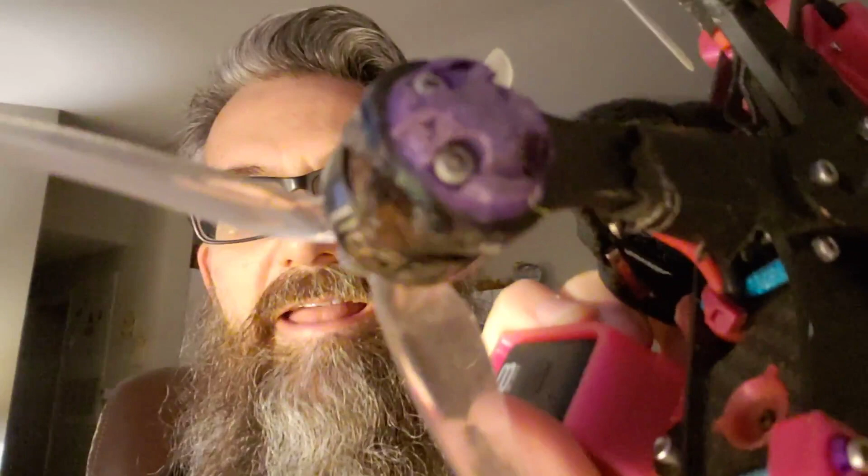Well, if you're like me before, you would just be like, oh well, I'll just suffer through it, and then your arms end up looking like that. Look at that mess. You get torn all the bits. Or you could be like Stacy of today. Design your own bumpers, and then you're good. So if you guys want to find out how to design your own and get those 3D printed, stick around, I'm going to show you.

Okay, so you decided to design your own 3D bumpers. What do you need to do this? We need a couple things. You're going to need a cup or something similar because you're going to want to set your camera up high on something. You'll see why here in a minute. You're going to need something else to set your arm on, a little bit lower. Don't you love this broken GoPro camera? Or something similar.

You're going to want to get a white piece of paper. And of course, you're going to need the arm, or arms if your arms are different. In my case, they're all the same, they're just flipped over. But if your arms are different for one side or the other, or for front or back, you're going to want to get an example of each one of those. And of course, you're going to need your camera.

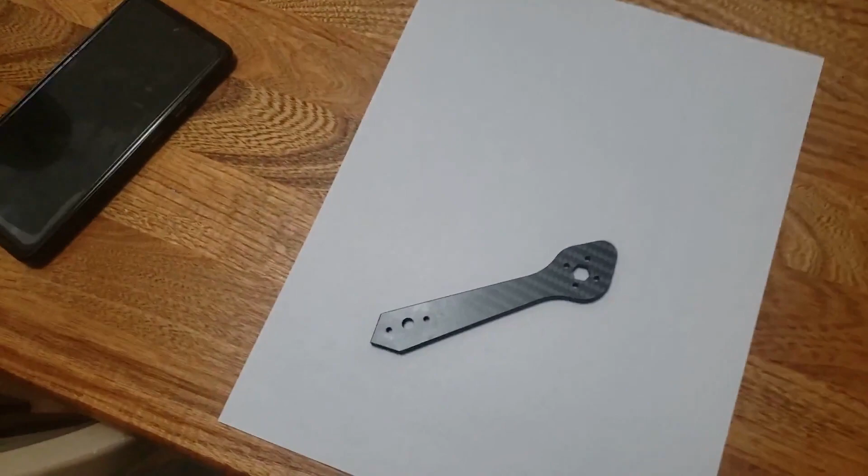So you're going to ask, how are we going to do this? What you want to do is take your cup here and sit your cup down on your paper. The reason we need this is we need something to set the camera on up high. Then we're going to want to get our arm and sit it down. We want to raise it up too. We want to put our arm on the paper. Why do we need the paper? We want the paper so that we don't have anything in the background. It'll make it much easier whenever we put this into our design program.

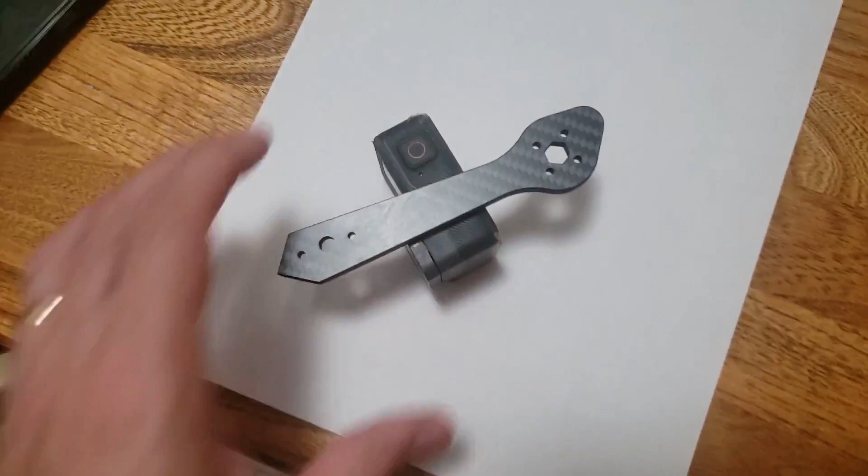And the reason we want to raise this up is you can see now I can see the holes through here, because we want to be able to see where those holes are. We're going to need those holes in the exact right position. Okay, so let's get this set up. My lighting is terrible. You want this to be in a case where you don't get a lot of shadows, but if you have shadows, it'll work out okay, you'll just have a little more difficulty. If you can have light straight down on top of it, it'll work better.

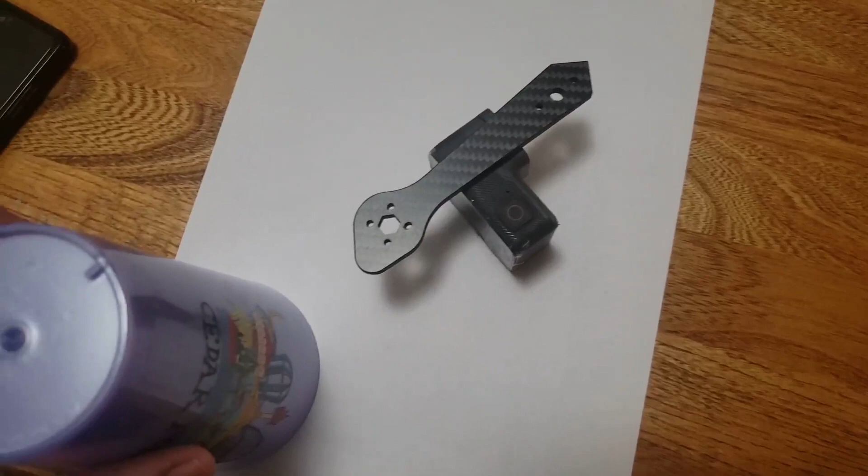So what you're going to do is set your arm here on something raised up, right? And then we're going to set our cup here, and then set our camera on this, and we're going to take a picture of it. So let me show you what that looks like on the camera app.

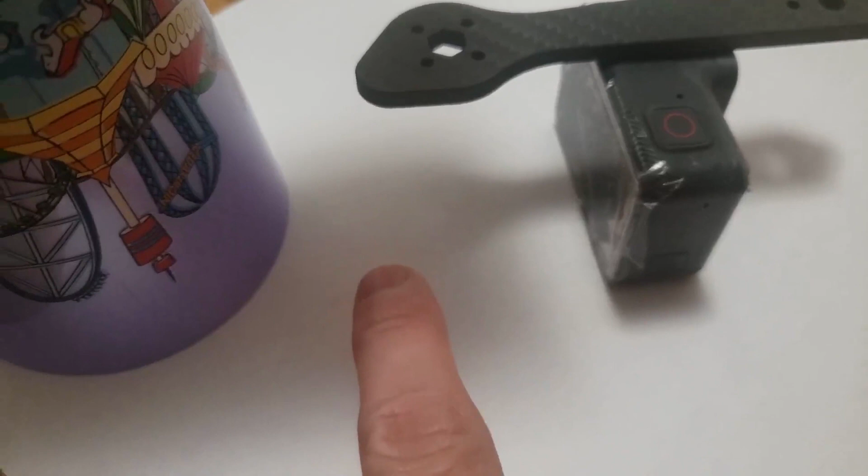Alright, so when you're all set up, you're going to have something like this. You've got your arm raised up here, sitting on, in this case, a GoPro, and then something a bit higher, a cup in this case, with my phone sitting on it and the camera facing straight down. When you take the picture, you're going to be able to see those holes nice and perfect, just like that. You want this as straight down over top of this as you can get it. Then we're going to take the picture, pull it into a program, and do a little cleanup on it.

Now I'm not going to show you the picture on my son's phone, I've already got the picture from mine. I'm going to show you the picture that I took, and we're going to walk through the steps with mine. You're going to see exactly how that works.

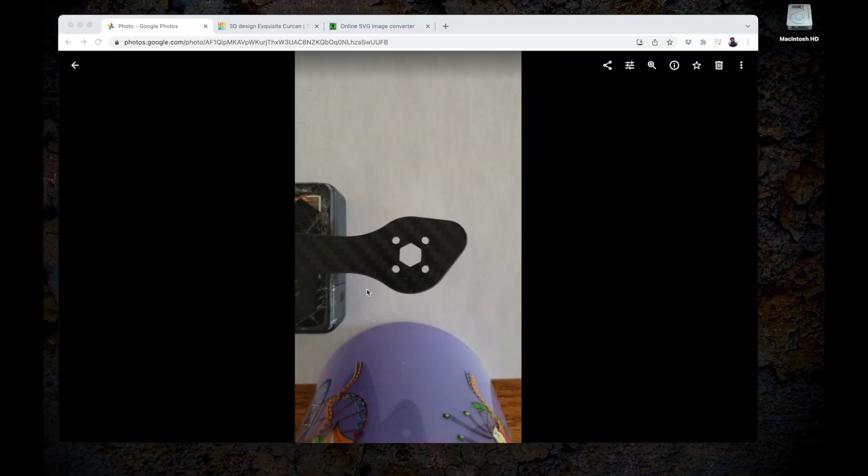This is the image that I ended up taking. As you can see, here's the arm sitting on top of the GoPro, and here's the base of the cup, just like I was describing, sitting on a white piece of paper. It looks like we have a pretty good image. There's nice clean edges on the edge of the arm, and the holes, everything looks nice and clean, and we don't see too many shadows.

There is a little bit of warping here because of the angle. The camera probably needed to be forward just a little bit more. It's pretty close - the arm needed to be down this way just a little bit, but other than that it's pretty good. So all of this is good, but I don't want to have this camera here.

I don't need the cup. I want to eliminate as much of this surrounding stuff, and I only really need about right in here for the arm bumper. So what I did was I took this image and then I cropped it down, and I will show you that. There it is, nice and cropped down. You can see it a little closer here.

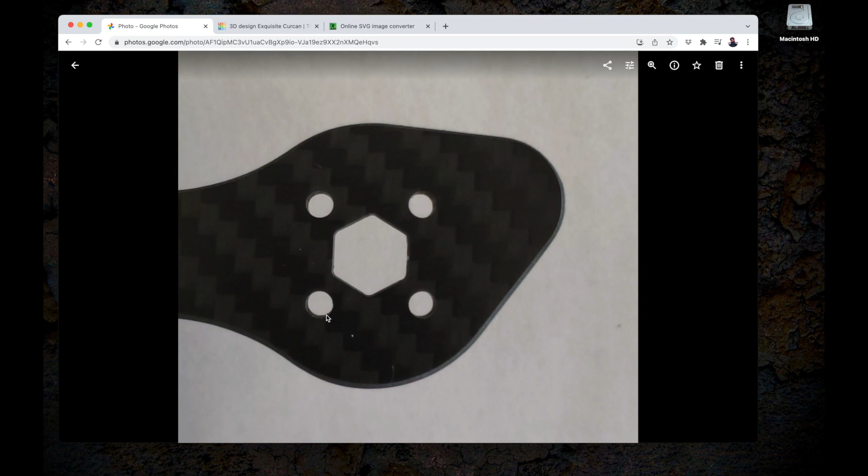You can see this warping really isn't warping, you're just seeing the inside edge of the arm holes here. You can see the thickness on the arms there. So if this was a little more straight down, you wouldn't see that, or you would see it a little bit less. Again, this is minor and really won't affect this too much.

What I'm going to do is pull this image, after I convert it to SVG, into Inkscape. I'm going to clean these holes up just a little bit because they will be warped just slightly, and I'm going to get rid of this center here because I don't want this in my arm bumper. If you wanted to leave this in your arm bumper, you could do that, but I'm going to take this out of mine because I don't want dirt and stuff to get up in there. So that's a piece I'm going to take out, gives it a little more strength as well.

Anyways, let's get into online convert and convert this image over, and then we will do a little bit of cleanup, and then we will pull this into Tinkercad.

With onlineconvert.com, we're going to convert our image to SVG. All we need to do is take our image that we took a picture of, and drag this up into here. It's going to load this, give it a few seconds. 100%, it's got it. There are settings that you can change depending on what you want to do.

Honestly, I've not used any settings, so I don't know what they do, what they don't do. But if you have a fairly clean image like we do, with a white background and your black carbon arm, you really shouldn't need to change any of these settings, and it should work pretty well.

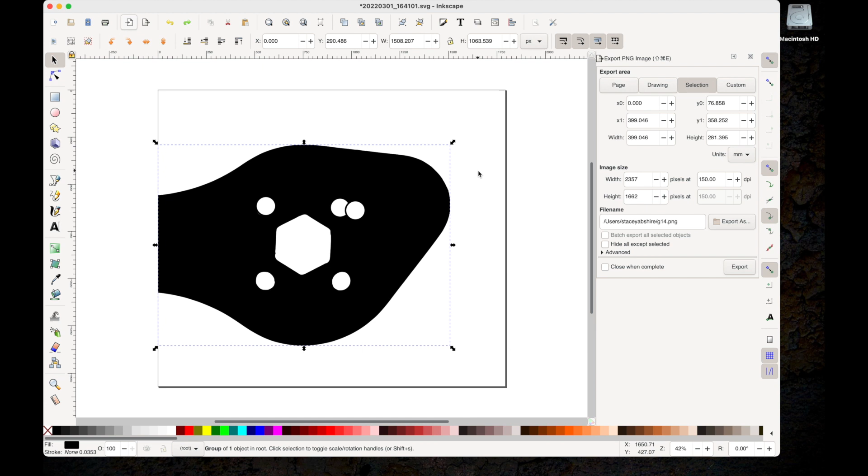Okay, this is starting to get on my nerves, guys. Undo move. Okay, I do not know what is going on here with this. Why is it being... let's try this. Let's try moving it with the keyboard. Ah, there we go, that's better.

So let's get it down in there with the keyboard. I'm using Shift and the arrow keys, by the way. There we go. Now let's paste another one, and we're going to use the keyboard and move it down here. Get close, move this all the way down. There we go, get those guys.

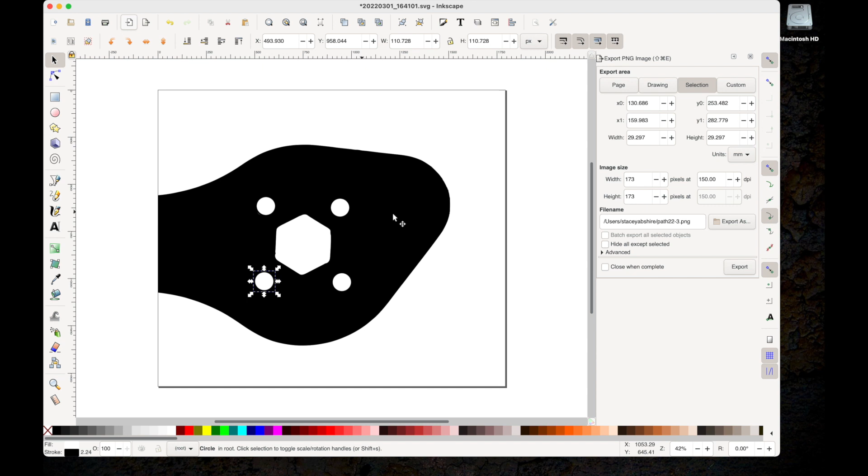Now I want to choose the fill tool, which is this bucket here, and we want to make sure our fill is black. Okay, got that. We want to fill this in. Okay, we have all of this done here.

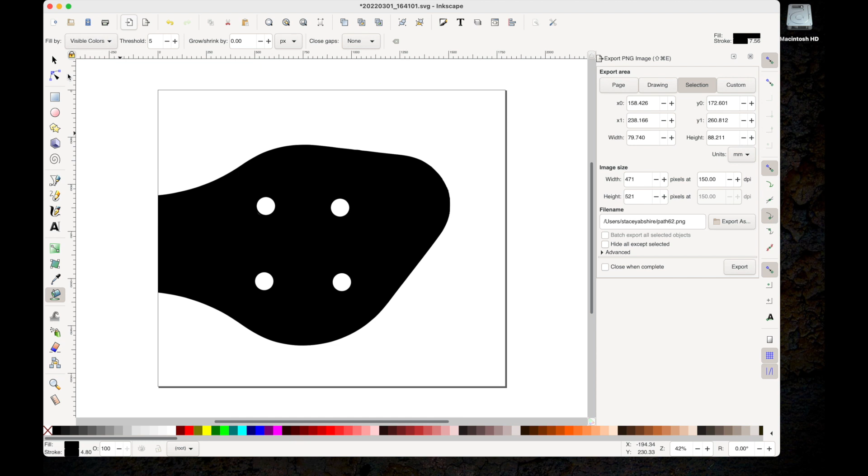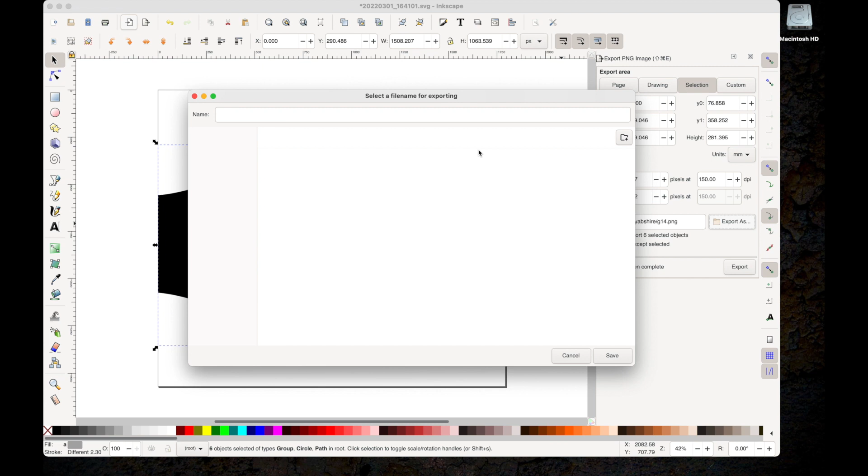Now what I want to do is select all of this here, drag and select this stuff. Okay, I got everything selected, and now I've got my selection here, and I've got where I'm going to export this out, and I'm going to change this position here, put it in download, and let's just call this moxy-1.png. That's where we want to export it. If I didn't actually export it, that's just where I'm going to export it.

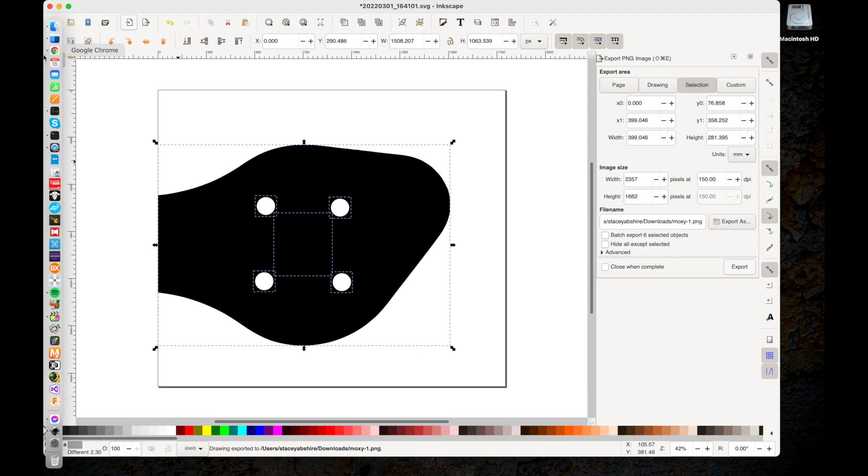Now you've got to actually click the export button. And we are on selection, and this is what we have selected. So hit export, and this will export out our PNG, and we will go pull this PNG up in Online Convert, and then run that through the process, and then we can pull that resulting image into TinkerCAD and do our designing.

Here we are with Online Convert again, and I'm going to show you what our resulting image looks like.

Let me pull this open here, and you can see our image cropped nicely right on those edges. Our pieces are filled in, and you can see these circles are nice and perfect, basically the same size they were before, but nice and round like they should be, which is what we want.

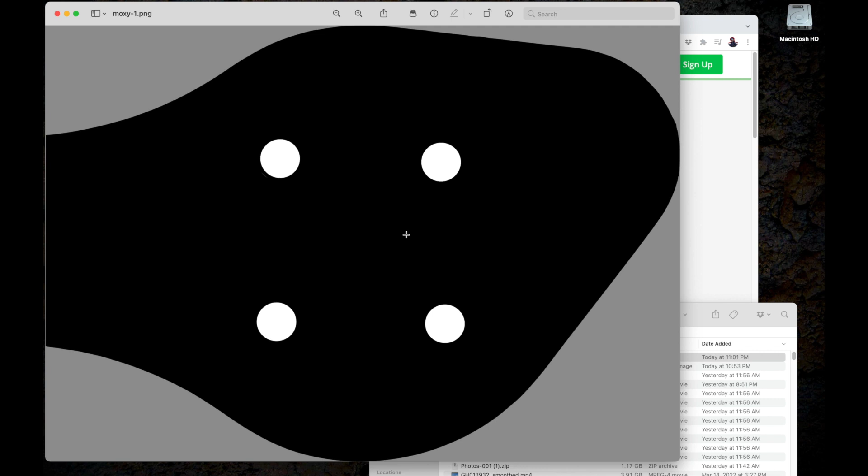So we're going to take this image and pull it into our Online Convert tool and convert this to SVG. We click Start, not changing anything, and it processes just like before and auto-downloads. There it goes, moxy-1.svg. I'll show you what that resulting image looks like. There we go, a nice clean SVG image, huge on screen, I know. It doesn't let me size it back down, but you can see just how clean this image is.

Looks very good. So now we're going to take this SVG image and pull it into TinkerCAD, and we're going to do our designing for our arm bumper.

Here we are in TinkerCAD, and we are going to import our SVG and do some designing with that. The first thing we need to do is go up here where it says Import, and we click Import. There we go. We're going to choose the file we just created, which in our case is moxy-1.svg. We take this file, drop it up here, and the first thing it's going to do is complain.

It's going to say, hey, this image is too big, it's going to be bigger than the workspace, we can't work with that. So we need to resize this to something that is workable.

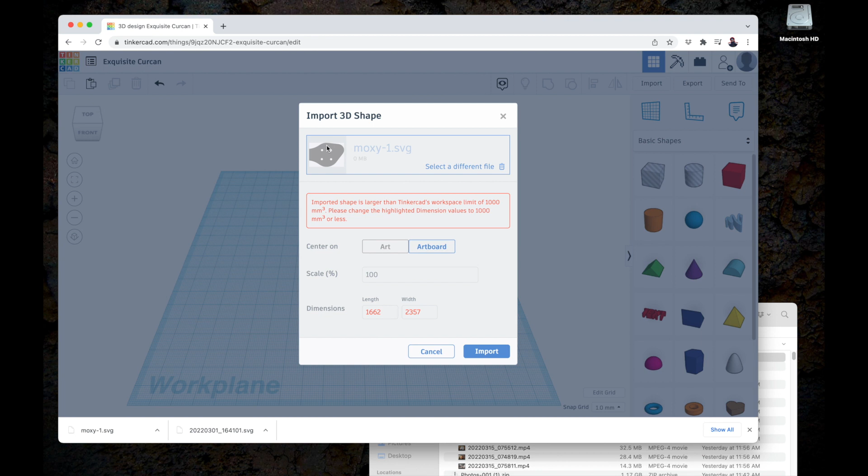Because I measured this and know that it's 30 millimeters, I'm going to come down to length and put in 30. It's already in millimeter mode, so I change that to 30, and it gives me the other dimension, 42.55, which is fine. I don't really know what that should be, but if this is 30, which it is, then this will be correct for this length here. And we're going to click Import.

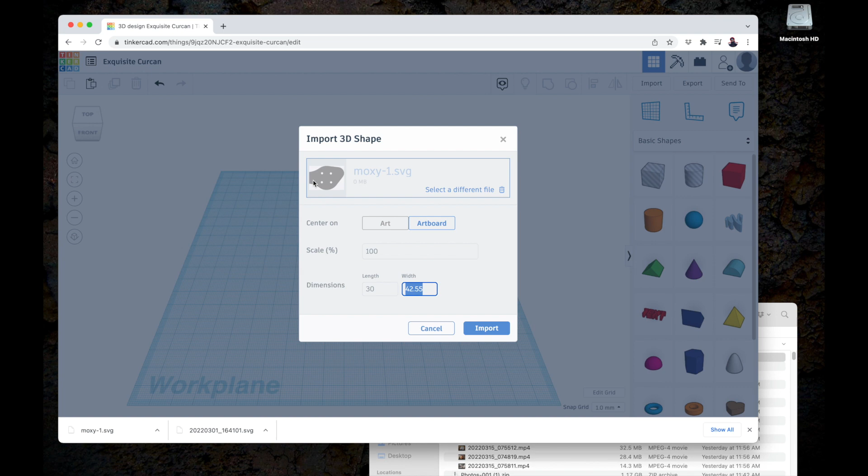This is going to pull our image in, and we'll have an object in TinkerCAD that we can work with. So I have to zoom this in so you can see it a little bit, just to show you what this looks like, and then we're going to work with it. You can see we got our holes there, nice, exactly what we want. Everything looks good—this is what the end of the arm looks like.

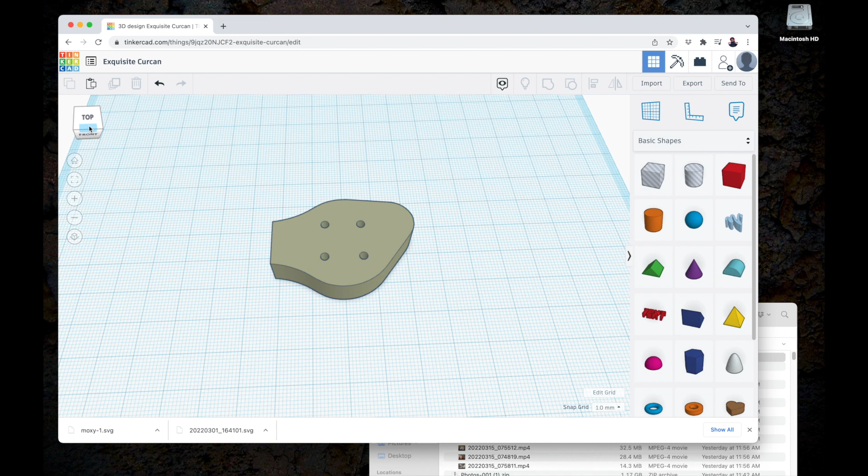Now, if you click this, you can see this is our size here: 29.99, basically 30 millimeters. I don't know why it's a hundredth of a millimeter short, but that's fine. 30 millimeters that way, and we see we're 42.55 millimeters that way, and right now this thing is like 10 millimeters thick. We're going to change that in a little bit, and we'll get to that.

So the first thing we want to do once we have this in here is create a couple of different pieces, and we're going to use those pieces and put them all back together to make the arm bumper.

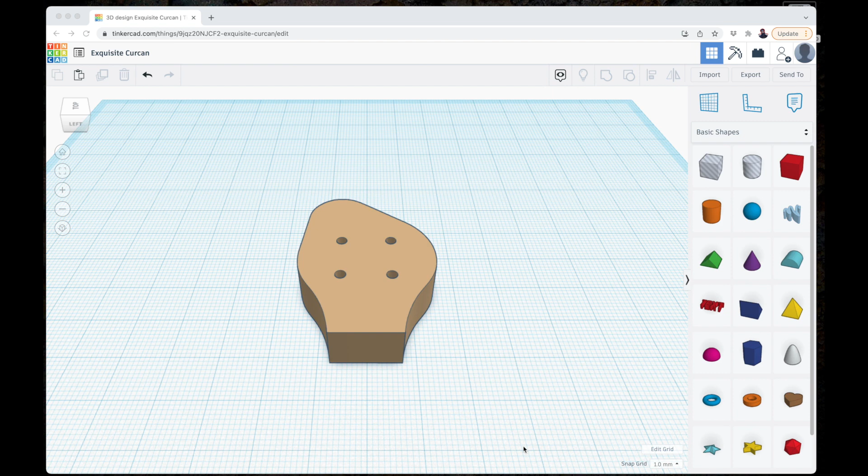So we have our image imported. What we need to do with this is create a couple of pieces.

We're going to have the bottom piece. We're going to have the side piece, which is like however thick your arm is. In my case, my arms are 5 millimeters thick. So that will be 5 millimeters plus the size of the bottom, which is 2 millimeters.

And then there will be an overlap piece that kind of fills in, comes over this part here, comes around, and allows that bumper to wrap around the top part of the arm. And so that part of the thickness there, it'll be 2 millimeters thick, and it'll be in like 2 millimeters on either side there. And so it'll wrap over top of the arm 2 millimeters.

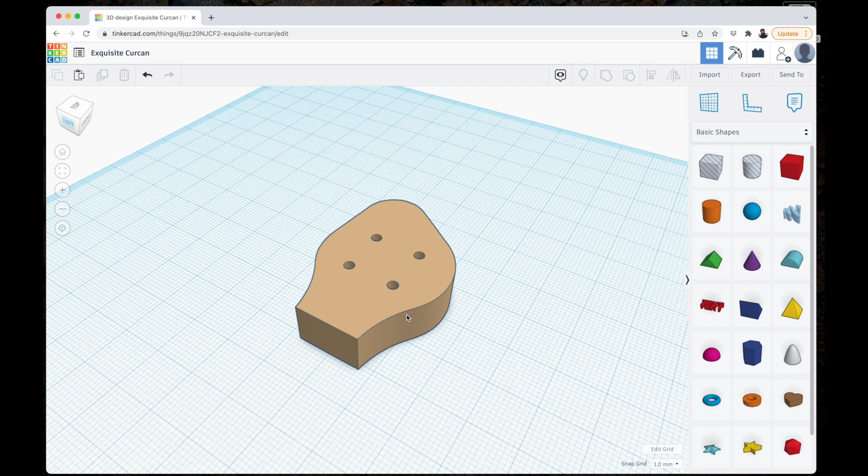So we're going to create those pieces, and then we're going to combine them, and then we're just going to chop off the bottom because it'll be solid all the way around, and there will be the bumper. And it's a very, very simple process to do. So the first thing that we do is we're going to duplicate this. So we're going to create this, we'll click this, and we're going to click the duplicate button.

That should duplicate it. Now we're going to move it, and I'm going to do it with the keyboard, so it's like Shift and the arrow keys to the left here. All right. So that's that first piece that I want to do. Now, the first thing that I want to do is I want to make this a silhouette here, and that fills this in. That makes it the same thing, but it fills it in, and then that'll make it solid.

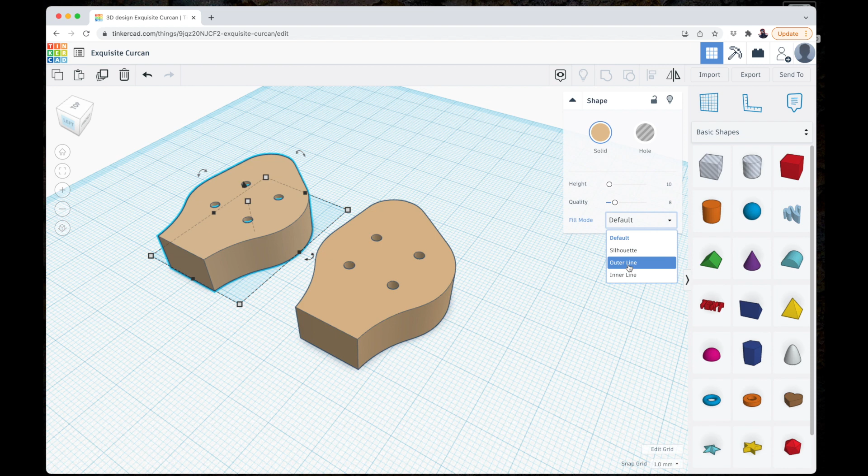And then you have outer line, which makes whatever size you feel, it makes it go from this edge out by that much. And then there's inner line, which goes from this edge and goes in. So in our case, we want to make the edges here, and those edges will be an outer line. Takes it a second here. There it is. And it's got it as 5. I don't want 5. I want to make this 2.

And then the other thing that I want to do is I want to make the corners kind of rounded. That just kind of smooths things out a little bit, makes it a little bit better, right? So that gets us our side. Now the next thing that we need to do with the side, though, is we need to make it the right thickness. Now our bottom of our bumper is going to be 2 millimeters. My thickness of my arm is 5 millimeters.

So that's 7 millimeters. And then I want to come up 2 more millimeters for the top, so I'm just going to go ahead and make it 9. And the only reason I'm doing that is just to make this thing have some overlap with the different pieces so they merge nicely. So I'm going to click this middle piece here. I'm going to set this to 9. Click off, now it's 9.

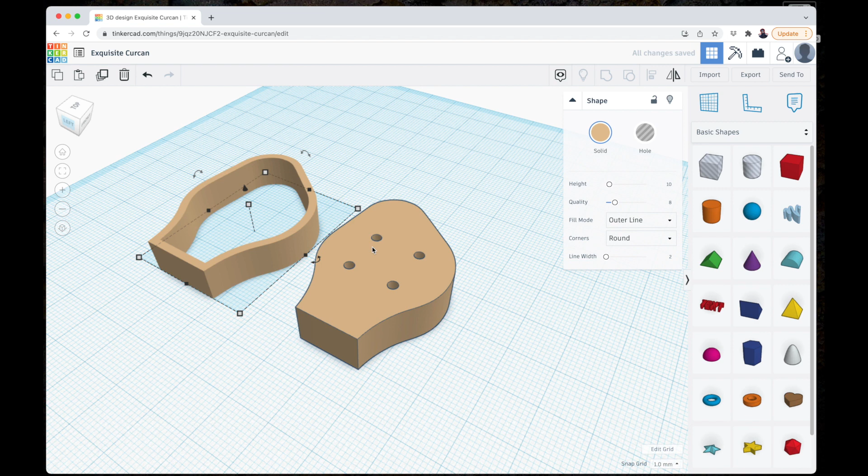Now the next thing I want to do is I want to duplicate this again. So click this. And now this time I'm going to hold down Shift. I'm going to move to the right. Not quite that much. Right. Now this one here is going to be this top piece. And it's going to have that, so I'm going to make this one inner line. And again, it defaults to 5, but I only want it to be 2. So 2, I'm going to come in 2 millimeters.

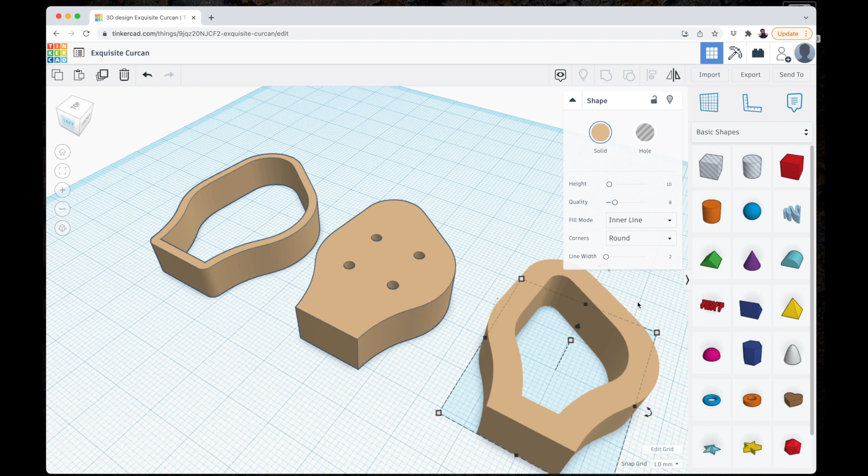And again, once it gets done here, I want to make this round. Okay. Give it a second here. It's thinking about it. There it goes. Now we've got that. Now this is going to be for the top. This only needs to be 2 millimeters. So there we've got that. Now I want to do one more piece and then we're going to combine all this.

I want to duplicate this piece here and I want to raise it up. So I want this like this, and then I want to have a piece on the top. And the reason that I want to have this on the bottom and on the top is I want to have a little bit of an overlap between this and this so that it kind of fills in that gap, right? So we're going to go ahead and duplicate this, and that'll be our top piece.

And then I want to adjust this inner on this one to be just slightly thicker so that when we put it all together, it overlaps nicely. So I'm going to hit the duplicate button up here.

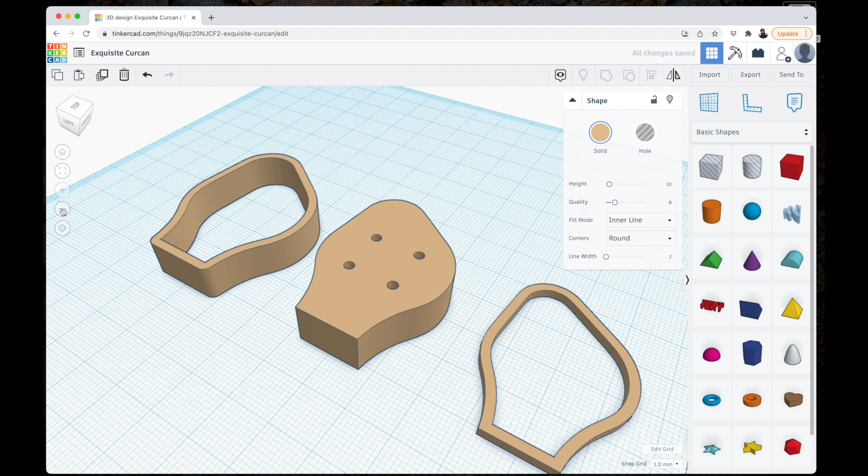And I think it duplicated it off the screen a little bit. Yep, it did. For some reason, it does that. When you move it and duplicate, it'll do the exact same mechanism. So if you do it and you don't see that it's selected, then it probably created it off the edge there. So I've got this. This will be our top one, and this will be our bottom one.

And I want to adjust this line width here. I want to make this 3. And that'll bring this in just a little bit more than the inside of this, which was 2, right? So we combine it. Now we've got our top, we've got our bottom, and we've got this here. And we're going to combine all of these pieces together.

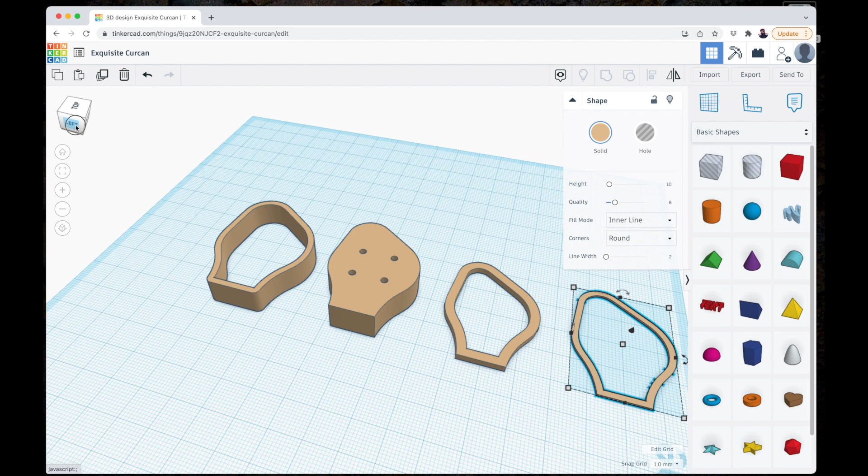The one thing that we need to do here, though, before we combine them, let me show you this here, if I look at it this way, you can see they're all flat on the plane. Well, this top piece needs to be raised up, and our centerpiece with the holes is too thick, so we need to do 2 things. We're going to adjust the thickness here to our 2 millimeters. So I click the middle there, click 2, that makes it 2 millimeters thick.

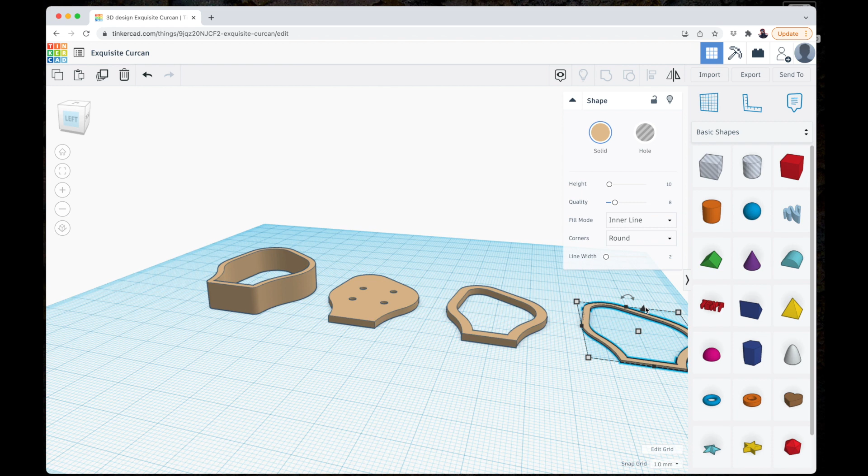And now this one here, we need to raise up. Let me zoom this out so you can see this a little bit. I'm going to grab this little arrow, drag it, and you can notice on the far right there, raising up, there's 3, 4, 5, 6, 7. If I can get it to 7, there we go. You can also click on it and adjust it that way too. So we've got it 7 millimeters up. That's our 2 millimeters here, plus our 5, which gives us 7 millimeters. That's where this will be.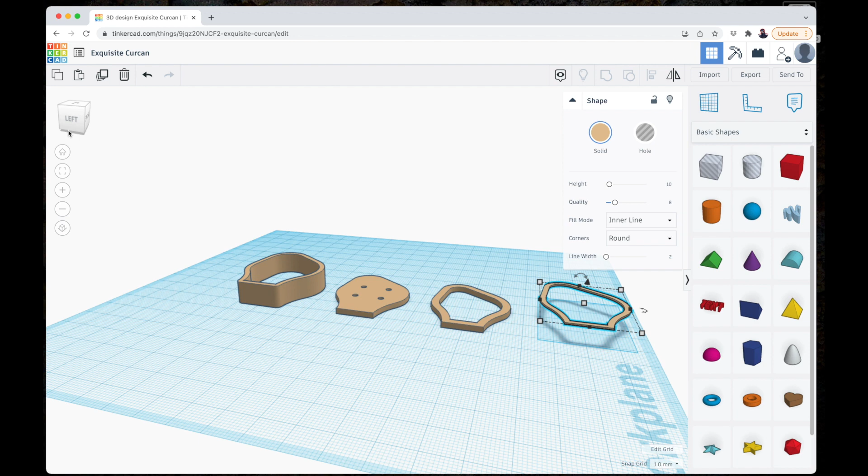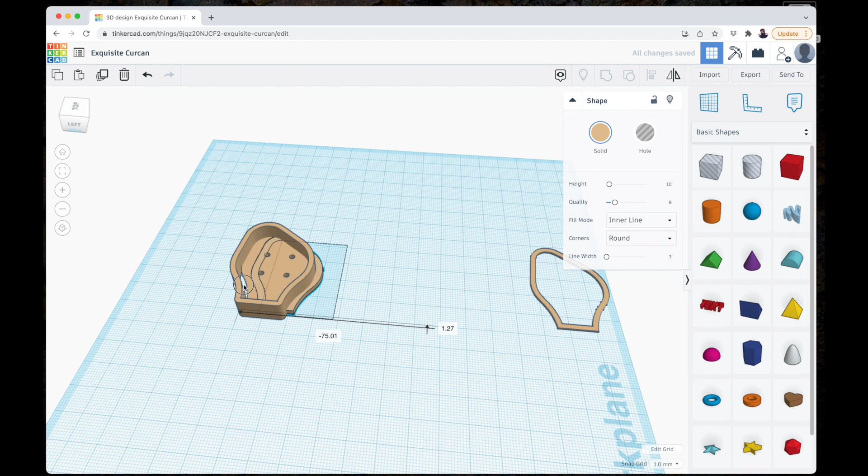And we're going to combine all of these pieces into one and line them up, and then we'll chop off the excess that we don't need, and we will have our arm bumper. So we're just going to take this, click it, drag it over here somewhere close to it. We're going to take this, drag it over here, somewhere close to it. Again, this doesn't have to be precise, and we'll see why in a minute. And then we're going to take this piece, drag it over and get it somewhere close. Now we've got all of our pieces here.

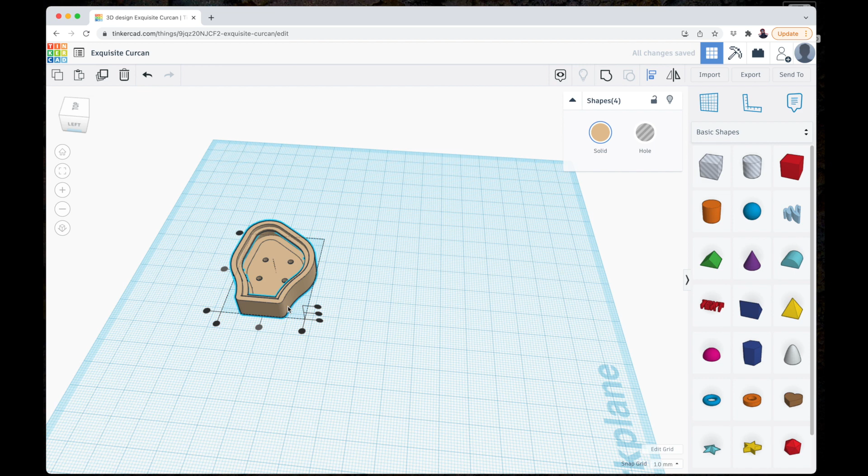Now we're going to drag the box around all of this, so we select everything at one time. We're going to click the Align tool. It's going to draw these little dots, and we want this bottom one here in the middle. That's going to align left and right, and then we want this one right here in the middle on the side. That's our front to back. Right now everything is aligned. We're going to now combine all of these. I got everything right.

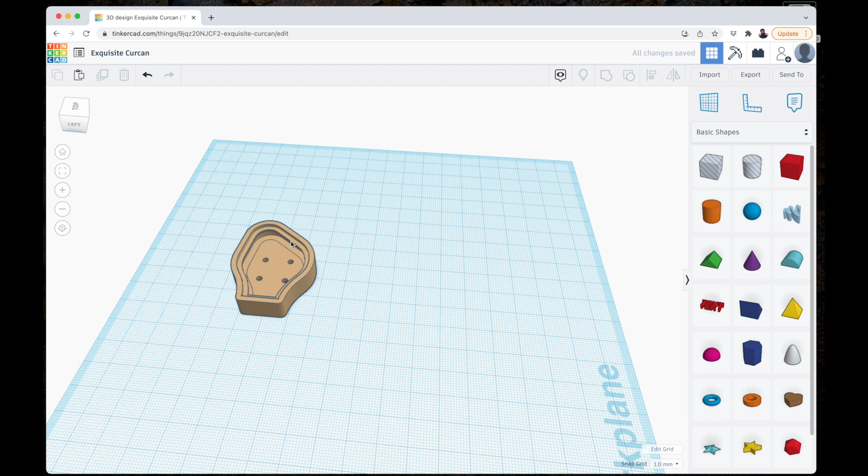Oh, I messed one thing up. I didn't raise my one piece up enough here. It needs to be raised up a little bit more. Hang on. They're still all selected. Now I'm going to hit ungroup. I'm going to select this inner piece here. That's our inner, our round. And I want to raise it up. On the top there, 9. There we go. All right, top of it's at 9.

And if you hear my dog in the background, I apologize. Got my dog to calm down. Maybe.

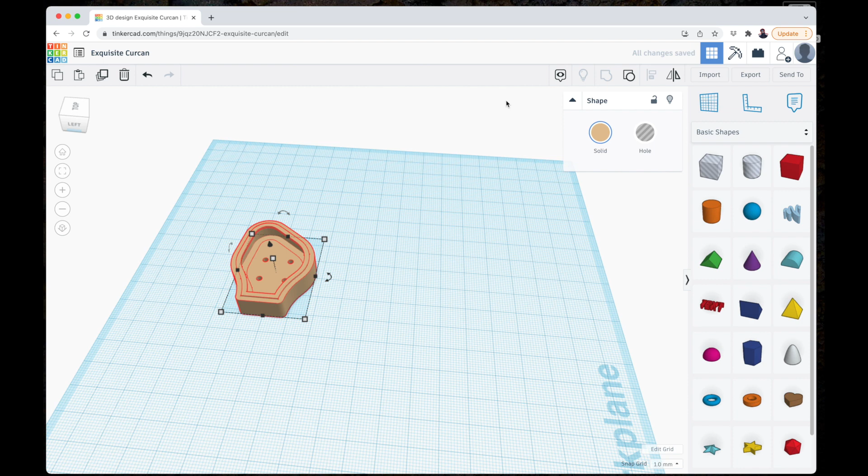All right, we're going to reselect everything, and we're going to group them all together again. Give it a second here for it to group them all together. Boom, we've got a nice solid object. Oh, we don't. Look at this. Do you see this little edge on this line here?

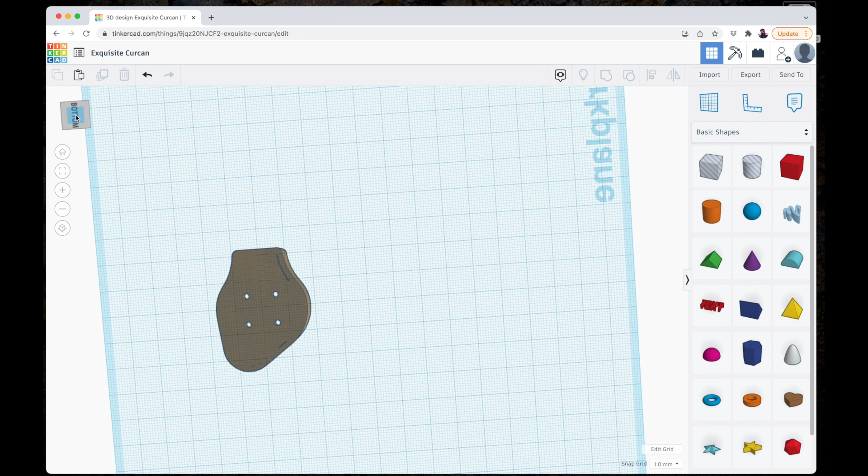On our piece, this is our top lip piece here. And if we look on the bottom, we've got the same issue. Yep, on the bottom, you see this little lip piece here, little edge. All right, so let me show you how to fix that problem. What I'm going to do is select all of these guys. This happens from time to time because this thing is not as precise as you would like it to be.

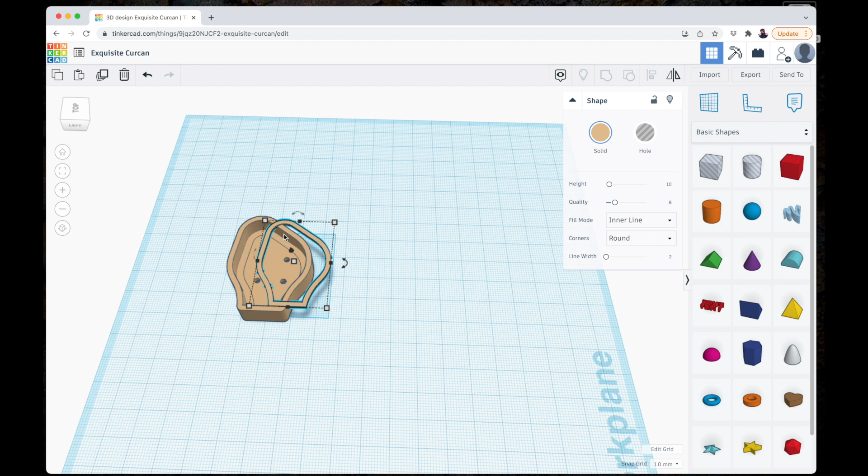We're going to ungroup these guys. I'm going to grab this one here, enter. I'm going to move this guy over here, the top one. And then I want to grab the bottom one as well. Bottom one's a little trickier, the outer line. Let's see, maybe just do them all. Let's move these guys all individually real quick to make it easier. It's stuff that happens. There we go, nothing to worry about. It's kind of why I like to show you these mistakes.

Okay, so these two pieces here, we need to make a slight adjustment because the edges are basically the same as these edges here, but we need just a little bit of overlap because even though they should be the same, there's slight imperfections in the mathematics. So we want to slightly adjust the size of this guy, make him slightly bigger this way and this way, and the same thing for this. We're going to adjust it by about 0.5 millimeter. It won't affect anything other than making this slightly bigger, because this is mainly just for overlap.

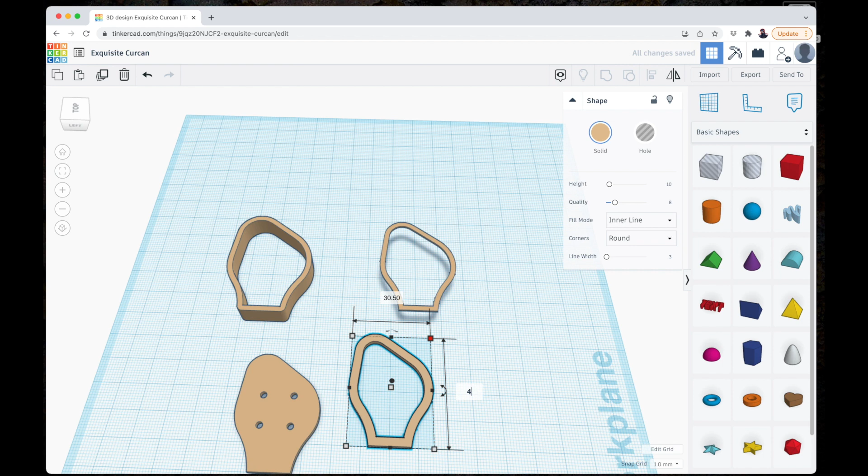So we select it, we click our corner, and you see it's 29.99 and 42.55. We're going to make this 30.5, and we're going to make this 43. And we're going to do the same thing here. I'm going to click this one and make it 30.5 and 43. Now we've got 30.5 and 43, and 30.5 and 43.

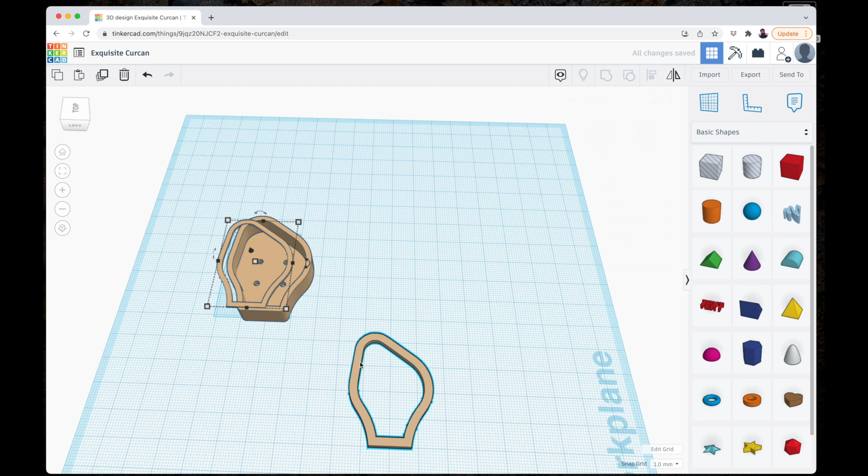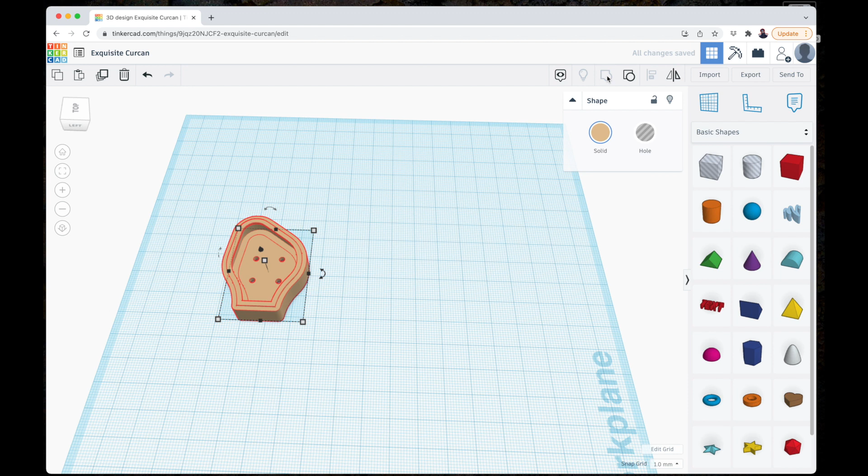Now when we take all of these pieces here, we drag this guy up, we drag this guy over, we drag this guy over, and you see they're way off from where they should be to be aligned, but that's fine because we're going to use our align tool. We click the alignment tool. Again, we want the center here, and then the center here. Now we're going to select all of them and combine them, and this should fix that problem. It should be nice and solid.

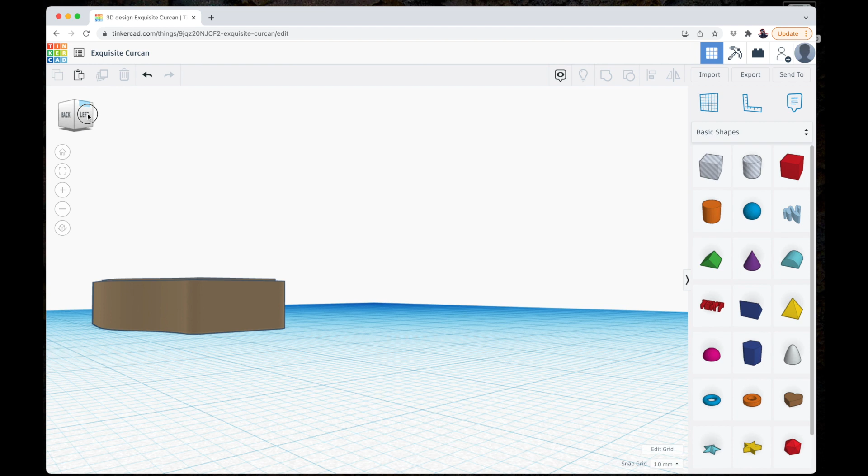Did it make it nice and solid or not? Looks like it's not. Oh, I've got something off on there. Haha, that's what's wrong. See the edge there? That's why it doesn't look solid. This guy is off a little bit. I must have moved something. All right, so let's zoom out. I like to show you all these little imperfections and mess ups so that when you're doing it, you understand how to fix it, it's not difficult, and you don't need to panic. It is a good exercise to show you how easy it is to mess something up.

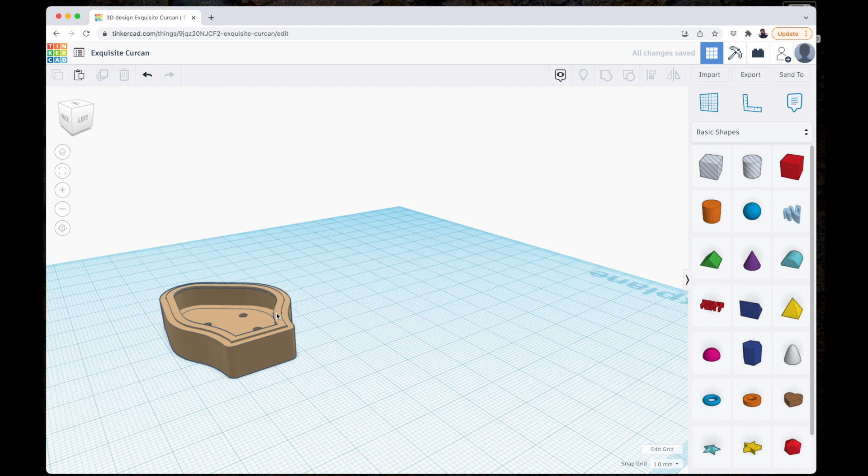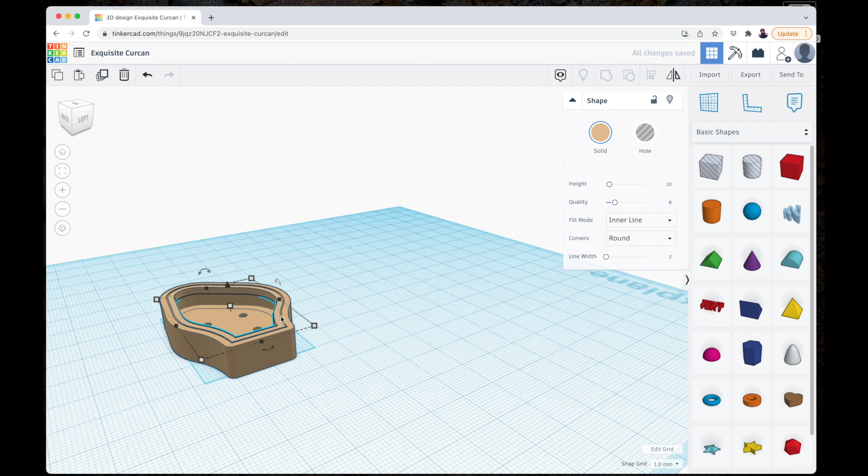So we're going to select everything and ungroup it. Again, it's not a problem. We're just going to select this guy here. Now this guy is up a little bit too high, right? We need to move him down. Not sure why. Let's make sure his thickness is right. His thickness is not what it should be. Let's switch on to, there we go. Now it's moving down. Okay, there we go. Now if we combine these guys, it should be good.

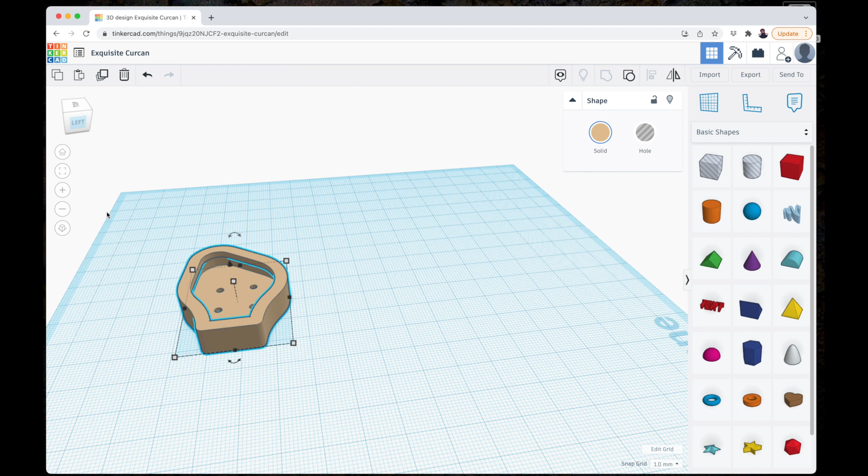There we go. Now you can see we've got a nice solid object. So if you see something like that, don't panic. It's easy enough to fix. Now you can see I've got this guy kind of out of whack over here; it's a little hard to follow. What we can do now is hit this tool here, which fits the view. And boom, look at that. Now you can see it nice and close. If we go on the bottom here, you can see it's nice and solid. There's no little lines anywhere through here. Everything is a nice solid object, which is what we want.

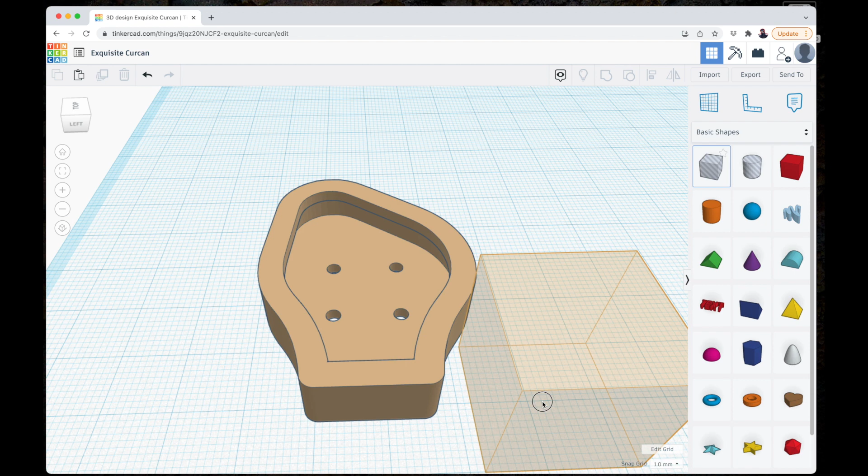Now the only thing that we have left to do is we don't want this to be solid here because we wouldn't be able to put it on the arm. We need a slot there for the arm to fit through. So what we're going to do is we're going to grab the box tool, but it's a hole. See, it looks like it's see-through sort of. We're going to drag this guy out here, and we're going to drag this guy over here, and we're going to chop off some of this.

So I'm going to drag him over about where I want him. Now let me click off and refit this to the view. Now we can see everything. Click back on this box. You see these little black lines here, little black boxes? You can grab those and that'll move the side. You don't have to adjust the corner, so we'll make it a little bit wider because we want to make sure we chop exactly what we need.

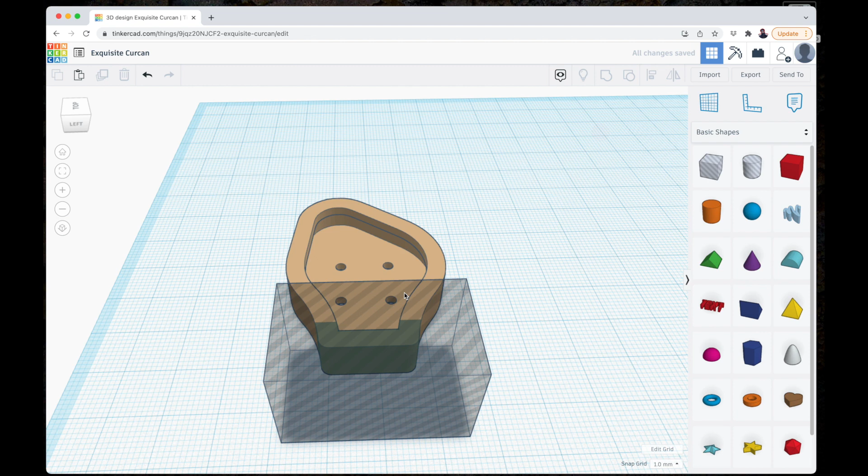There. Now let me look at the top. You can just click top here, top view. And I want to move this guy down just a little bit because I don't want to chop too much of this off. I want to get just enough to get the edge of this right here chopped off. I think that I've got it there, but I want to move it up a little bit more. I don't want this much in. I like to be somewhere in the middle.

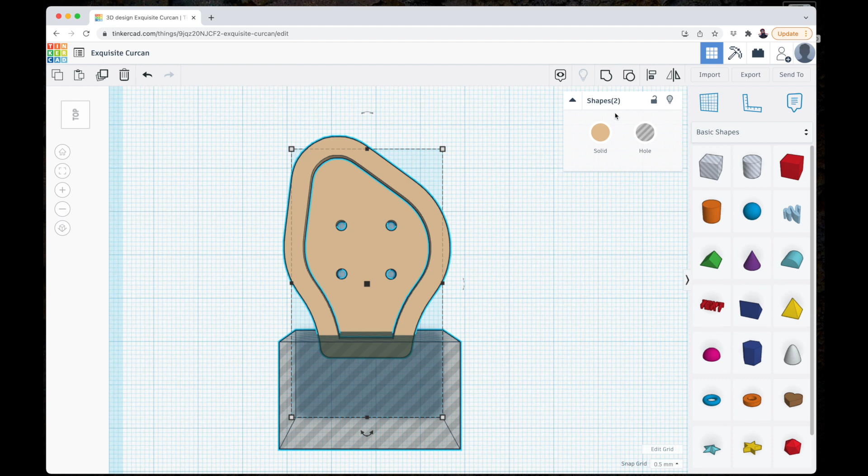So one other thing that you can do is you can adjust your snap down here. You have a 1mm snap, which is moving 1 millimeter at a time. You can adjust that. You can make it bigger or smaller. I want to move it 0.5 millimeter. So when I move it up, I'm going to move it up 0.5 millimeter. That'll be perfect. Now I'm going to drag a box around these guys, select both of them. I'm going to group them, and that should apply a hole right here. Give it just a second.

There it is. Now what we're going to do is I want to adjust my view. See this, when you highlight this here, you've got top, and then this is like top and the side here. Click that. Boom. There we go. And there is our arm bumper.

The only thing that we have left to do now is just export this out as STL and send this off to someone to print, or if you know how to do printing, you probably already know how to do all of this other stuff, which I don't know. There's some setup in the printers and whatnot for these to do, and I don't know anything about that.

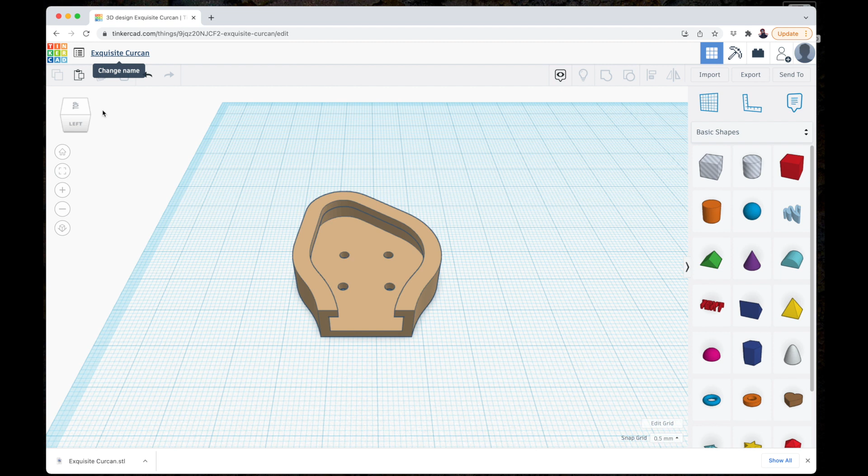One other thing that you might want to do is you'll notice TinkerCad comes up with these weird names. In this case, it's Exquisite Curcan. You can click this, and then you can type in whatever you want. If I said Moxie Arm Bumper example, for instance. And then when I export this, it's going to use that name, STL. And you will see down here, when it exports it out, eventually, maybe, there it goes. We have Moxie Arm Bumper Example STL.

And that is all there is to designing an arm bumper. It's fairly simple, fairly straightforward. I hope that this tutorial was helpful for you guys. And if you guys have any questions, feel free to ask, and I will do my best to answer it. I am a newbie at this, but I thought that I would share my experience and what I have learned. So hopefully you guys can go out there and design your arm bumpers to protect your drones so they don't break so easily.